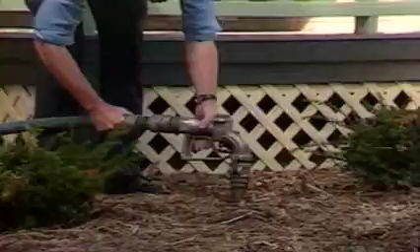When you see oil being delivered, you assume that it will find its way to the burner where it will provide efficient combustion. But that's not always the case, and too often an appliance is blamed for a supply system problem. A typical supply system consists of many parts, starting with the tank.

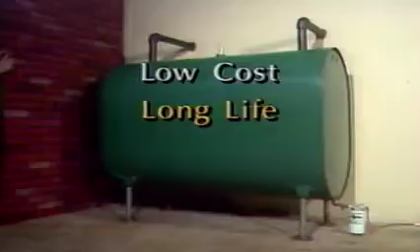There are three possible locations for an oil storage tank in a typical residential system: inside the home, outside the home above the ground, and underground. The inside tank offers low cost, long tank life, easy piping to the burner, and consistent temperature of the oil regardless of the weather, for uniform viscosity and stable combustion.

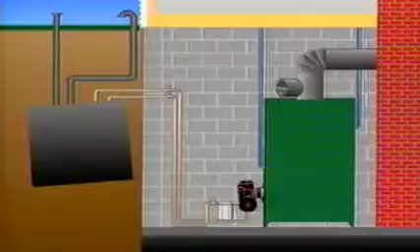When servicing an outside, underground tank, comply with local regulations. Make sure the end with the oil supply line is positioned slightly higher than the end with the fill pipe. This prevents accumulations of water from reaching the supply line and getting into the burner. It also makes it easy to pump out any water which has settled under the oil. The vent pipe should have an overfill vent whistle or alarm.

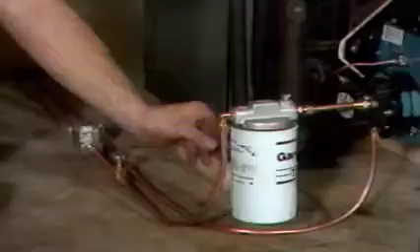Now let's go to the basement to check the supply line. Generally, the supply line is 3/8 inch outside diameter copper tubing equipped with a fusible shutoff valve. This allows you to shut off the oil flow during servicing. When the fuse melts, it automatically stops the flow should a fire occur. 1/2 inch can be used if you need a longer lift or have a higher vacuum requirement.

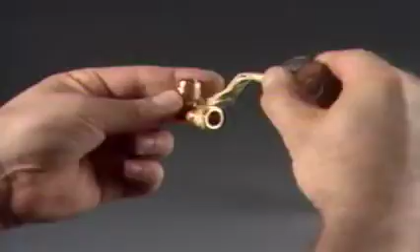Normally, the return line is also 3/8 inch copper tubing, which is usually sufficient for a residential installation. Make sure all fittings are tight to prevent oil from leaking out and air from entering the supply line to the burner. Join all threaded connections with a pipe compound that is oil resistant and will remain flexible. Apply the pipe thread compound with a brush, taking care not to allow the excess to overflow into the bore. Next, tighten the threaded fitting into the bore.

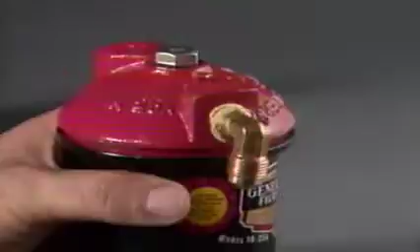In many installations, 2 burners are piped to 1 tank. Install a shutoff valve on the supply lines to each of the burners. The suction lines will also need a check valve or electric solenoid valve next to each fuel pump to prevent a vacuum created by one fuel pump from pulling oil out of the other pump.

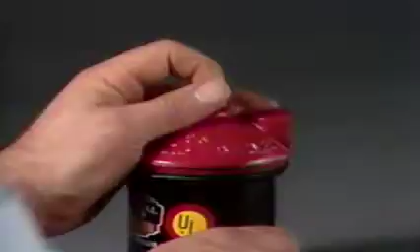2 types of filters are normally used in the oil supply line: the cartridge type and the spin-on type. Remove the bolt on the cartridge type filter to take out the filter element for cleaning or replacement. The spin-on type is installed and removed in one piece, like an automobile filter.

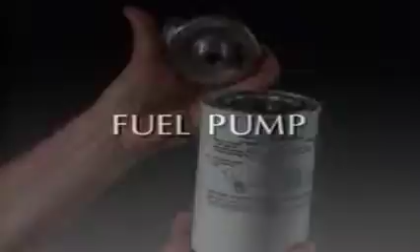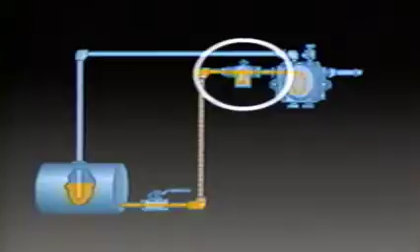The fuel pump is a vital component of the oil supply system. Here's how it functions. Oil enters the fuel pump from the supply line and circulates through the fuel pump where sufficient oil is withheld for the burner nozzle. Excess oil goes back to the oil tank through the return line. In a single pipe system, oil is returned to the gear set for recycling.

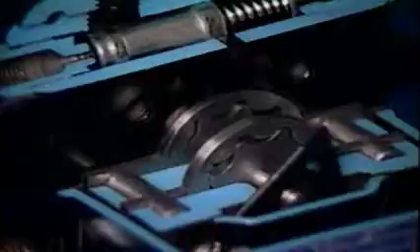Here is an inside view of the pump and its operation. The oil is pumped by a set of gears. In 2-stage fuel pumps, there are 2 sets of gears, but the operation is essentially the same. Capacities can range from 25 to 250 gallons per hour.

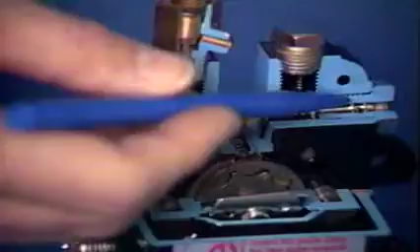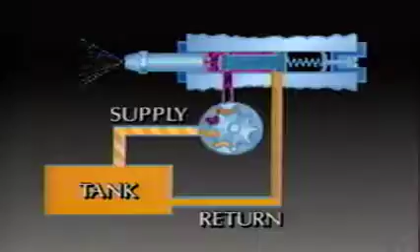As the oil is pumped, it is also conditioned by the gears. Small impurities are either ground by the gears into minute particles too small to clog the nozzle, or filtered out at the pump. The valve assembly, shown in this cutaway model, controls the actual pressure of the oil fed to the nozzle. The pressure regulating valve assembly feeds the oil at the rated capacity of the nozzle and returns excess oil back to the tank.

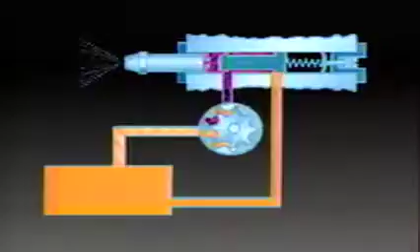Pressure can be adjusted using this screw adjustment on the fuel pump. In addition to conditioning the oil and controlling the rate at which it is fed to the burner nozzle, the fuel pump also controls the cutoff of the fuel flow when the burner shuts off. Slow cutoffs cause smoky, noisy starts and stops and carbon deposits on nozzle tips, electrodes, and combustion chambers.

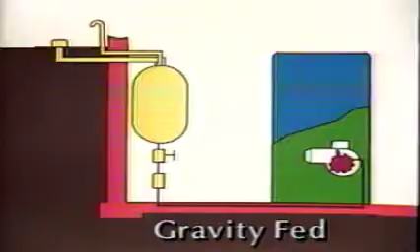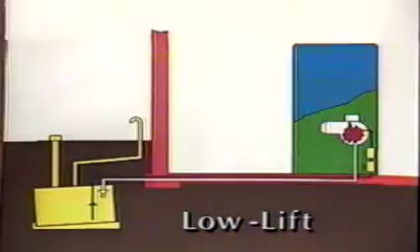In gravity-fed systems, where the oil supply is above the burner, a single-stage fuel pump is usually sufficient. Single-stage pumps can also be used in low-lift installations where the total lift does not exceed 10 inches of vacuum on a 2-pipe system and 6 inches on a single-pipe system.

2-pipe, high-lift installations requiring up to 15 inches of vacuum usually take a two-stage pump.

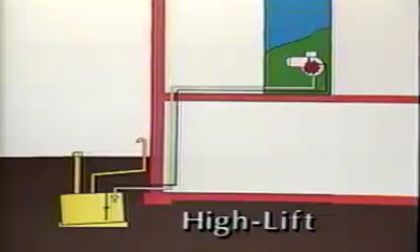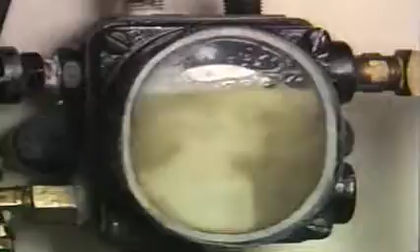Now we're going to see why airtight fittings are so important on the supply system. In a one-pipe system, air can enter at any mechanically sealed joint that is defective or loose. Air in a one-pipe system causes foaming in the fuel pump, excessive noise, and eventually the loss of the prime. Make the necessary repairs to ensure leak-free oil flow.

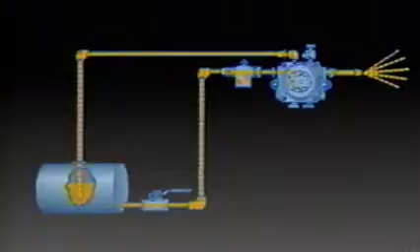Two-pipe systems are self-priming, self-venting, and self-purging. Because any major air leak would still be a problem and could also produce an oil leak, make sure the supply system has no leaks.

Most fuel pumps are adaptable to either a one-pipe or two-pipe system. However, for peak efficiency, a two-stage fuel pump should be used in two-pipe systems only, since the advantages are lost when used in a one-pipe system.

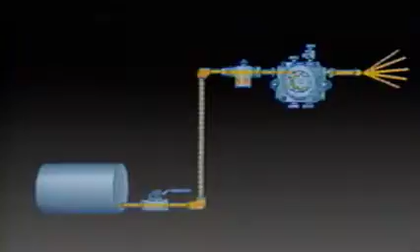Consider the one-pipe system. The pump only needs as much oil as the nozzle can burn in an hour. 3/8-inch copper tubing usually does the job well.

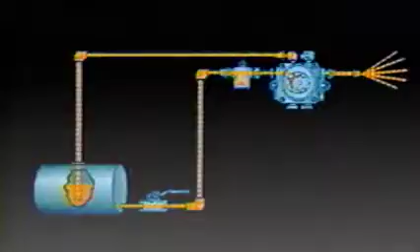But because two-pipe systems move the entire pumping capacity through the suction and return pipes, it is vital that you size the piping for the job.

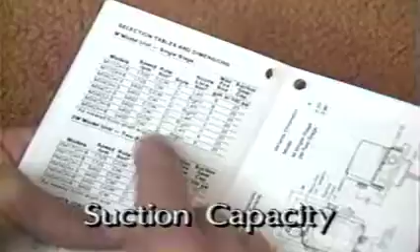First, check the suction gear capacity of the fuel unit. Pump manufacturers provide selection tables based on their particular pump models. For each model, you'll be told how many gallons of fuel are handled in an hour.

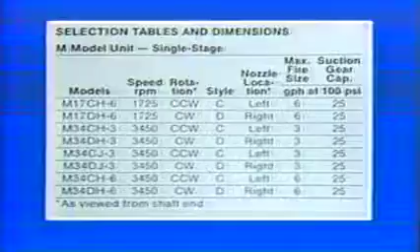Next, the total length of the supply lines in the system is measured using a sketch. For example, let's say that we have a total of 25 feet of lines.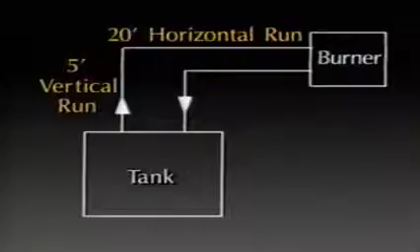Now, friction loss has to be estimated using charts in the serviceman's manuals available from the various pump manufacturers. Start by reading the total feet of 3/8-inch copper tubing along the bottom of the chart. Then move straight up to where you can read the suction capacity of the fuel pump.

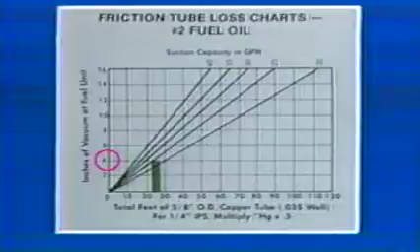Then move left to the vacuum figure on the left-hand side of the chart. Now you know how much vacuum is needed to draw oil through a 3/8-inch tube that's 25 feet long.

Since we know that a single-stage pump, two-pipe system allows 10 inches of vacuum, and we only need 4 inches, a single-stage pump would seem like the logical choice.

But what about restrictions such as vertical lift, filters, fittings, and check valves that add to the vacuum required? Start by adding 0.75 inches of vacuum for every foot of vertical lift. In this example, you have 5 feet, or 3.75 inches of vacuum, for a total of 7.75 inches.

But there's also a line filter with 1 inch of vacuum for the filter and the fittings. Then add them up to see if you're still within the 10-inch capacity of the single-stage pump.

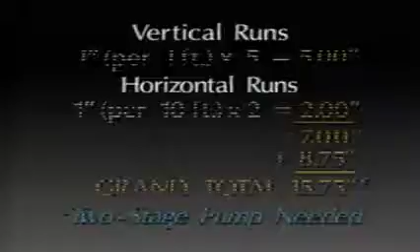Vertical and horizontal runs can also create friction loss. The rule of thumb here is 1 inch per foot of vertical run and 1 inch per 10 feet of horizontal run.

A vacuum gauge installed in the optional inlet port on the pump or on the body of the filter can be used to check the suction line vacuum.

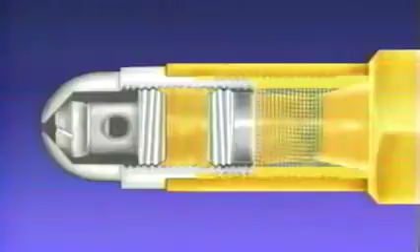The nozzle. Oil enters the atomizing nozzle through a screen mesh or sintered filter and travels through a set of stainless slots or tubes. Here's where pressure energy is converted to velocity energy.

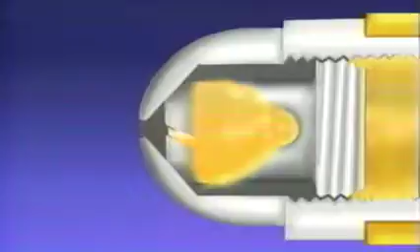The high-velocity oil finds its way to the swirl chamber where it rotates toward the nozzle orifice. A spinning tube of air propels the oil out of the nozzle in a finely atomized spray. At the combustion head, the atomized oil mixes with air for efficient combustion.

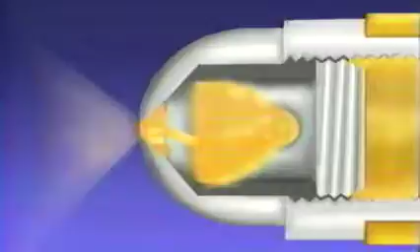For the most efficient atomization, the nozzle pressure has been standardized at 100 psi. Nozzles are available in a variety of flow rates, but all are calibrated at 100 psi.

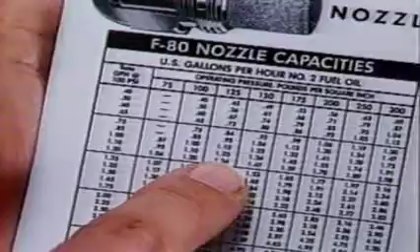Cold winter temperatures cause higher oil viscosity. This results in a higher flow rate with a narrower flame and smoky tips that form soot. And of course, inferior oil can also cause a problem with nozzle performance.

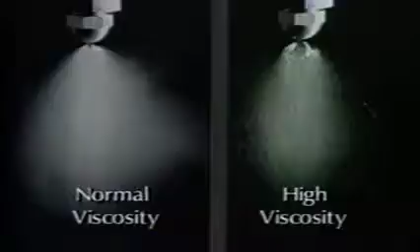Follow the nozzle manufacturer's recommendations, if available, when choosing a nozzle. Otherwise, consider the flame pattern that's most appropriate for the chamber. Then order the nozzle that will give you that pattern. The two most common patterns are the solid and hollow patterned nozzles.

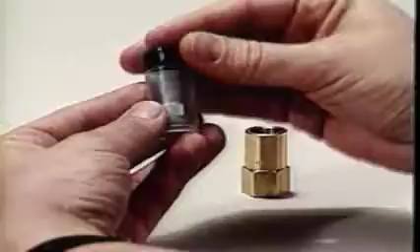Because of the precise character of a nozzle's orifice and filter, nozzles should be handled with respect, carefully stored before installation, and kept from any type of dirt or damaging impact.

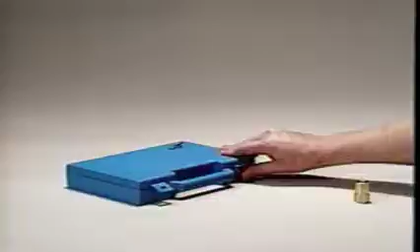As for cleaning nozzles, it's seldom advisable. With a low cost of replacements, it's best to simply replace an old nozzle with an appropriate new one.

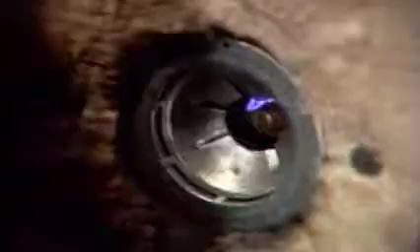Now we're ready to apply the spark that will ignite the oil. We'll see that in Volume 4, entitled Putting a Retrofit Burner into Service.